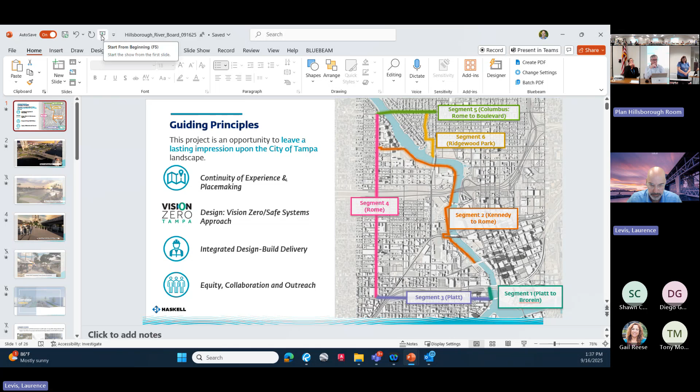Can you see this well enough? Not yet. One second, we are adjusting the volume. Okay, are you sharing your screen now? We were seeing it online a minute ago. We're just working on in-room issues. Okay.

Yeah, if you want to share your screen, Larry. We saw his face, it was up for a second. Yeah, I thought I was. I'll do it. Right, let's share the desktop, let's see if that will work. We see your calendar now. Hmm, somebody's calendar. I'll leave on his, different monitor. How about, yeah, that's a different monitor. So let me go to the desktop. Oh, it's on for a second there. There it is. So just move your presentation over to your other screen. Yeah, you have, yeah, this is on my laptop. Oh, okay, so if we click, saw your blue screen for a second there, yeah, if you click on share on the top right of Teams, you can select the presentation from the drop-down menu, open up.

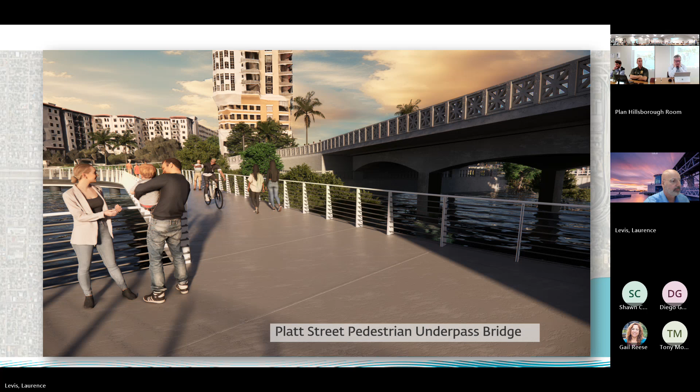Segment one will pick up at the north end of the existing Bayshore Boulevard Trail, south of Platt Street at the Columbus Statue Park, through the pedestrian underpass under the Platt Street Bridge, and go through Tony Jannus Park, temporarily along the seawall but ultimately arching through that park. THEA is going to be widening their Selmon Expressway as well. Then there's another pedestrian underpass under the Brorein Street Bridge, and that whole area is in green.

Nina, you can talk about the area between the Brorein Street Bridge and Kennedy and what's happening there with the joint development. There's currently a gap between our existing river walk that ends at the south side of the WFLA, next to our property. The city is talking to them about that. They have a condition in their old DRI, or rezoning, for the river walk on their property, but we've been having some communication issues, let's put it that way.

Just north of them you have the related group, formerly the Lafayette parcel, just south of the Kennedy Boulevard Bridge. They're supposed to be starting summer of '27, perhaps, and we're coordinating with them as well. They're going to develop towers along Kennedy Boulevard, west to east, then put a river walk on their property frontage and another pedestrian underpass under the Kennedy Boulevard Bridge, which they're currently having FDOT review since Kennedy Boulevard is a state road, but the river bottom belongs to the city.

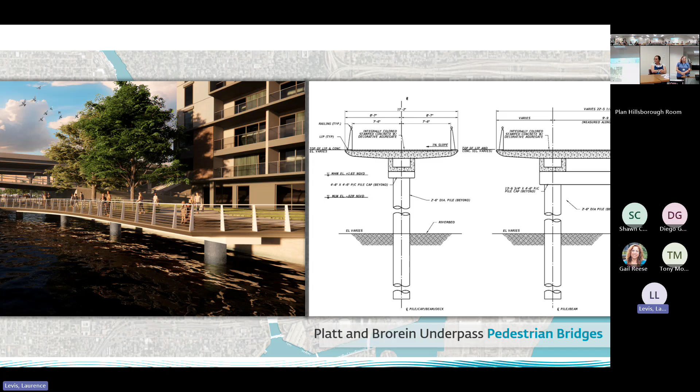So this is the way the bridges are being constructed right now. They're in advanced permitting and in-water permits. That's the Brorein Bridge, just north of the Bird Rookery, in the area Nina was just describing in front of that private property and apartments. The city has a typical easement for the river walk along the seawall.

The trail design is a little different as it goes through this 1.5 miles. There are certain areas where we will have living shoreline, a total of 1,500 lineal feet throughout the project. Where that happens, the toe of the slope will extend no more than 30 feet into the river with riprap, and there will be some encouragement of mangrove. I think you've seen other examples of living shoreline on the east side of the river.

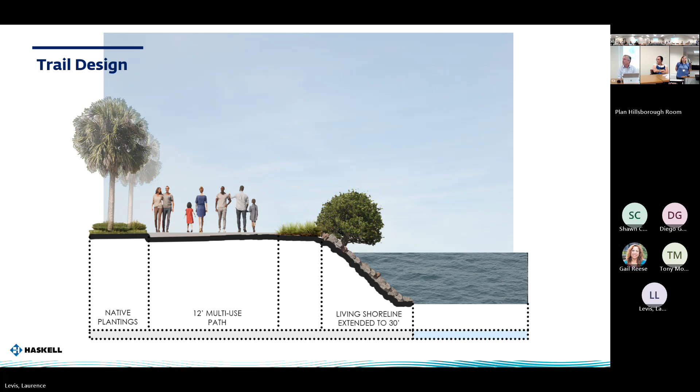Sam has done an excellent job keeping the public informed, and I'll turn it over to you, Sam, for a couple of slides.

We do have our next public meeting scheduled for October 16th. Is that right, Larry? Yes. And when he tells you about the website later, that alert for the meeting will be on the website. It's going to be in the evening at Beulah Baptist Church over in the West River area.

If anyone has used the app for the project, it's been up and running for a few months. You can get it on your mobile phones as well as on the internet. It's www.westriverbuilds.com, with multiple tabs for maps, explanations, frequently asked questions, and an alert site. Once construction starts, probably mid-November, particularly on the living shoreline near the Platt Street Bridge, there will be construction updates and detours posted.

The in-water permitting is continuing quite well. The bridges and underpasses we anticipate will be fully permitted by the first quarter of next year, and we've already received the living shoreline permit. That's encouraging, and it leads us into the sequential construction starts, as Nina just alluded.

Segment 1 demo, mid-November. Segment 1 is Tony Jannus Park. The living shoreline south of the Platt Street Bridge, a little section between the Platt Street Bridge and Columbus Park, will start in early December. Then segments 2, 3, and 6 have a January or February start date—again, this is just a sequential flow. Segment 4, Rome Avenue, and the bridges would begin in February and March after we get the permitting, and segment 5 in April and May.

Segment 5 we didn't talk about much, but it's a little piece that's in concert with Hillsborough County up at the corner of Rome. So that's where we are—that's the update of the project and the schedule.

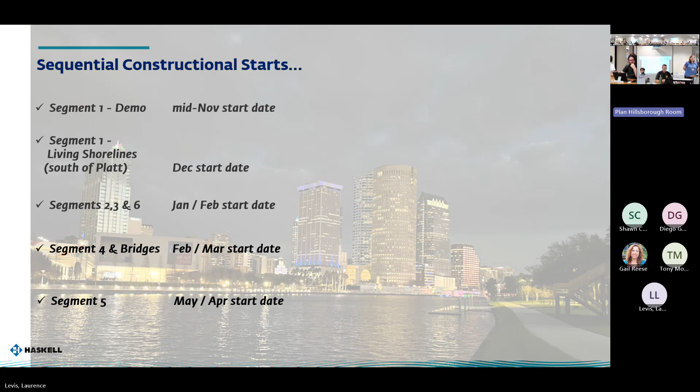Any questions? Larry, you did receive the permits from EPC with the manatee restrictions for time of year, correct, for most of the living shoreline? Correct. Those were just approved a week or so ago—September 8th. And Haskell is returning requests for additional information back to some of the permitting agencies today. That's part of this—the bridge, underpasses, and overlook—which we anticipate will take a little more time, but we're in the thick of answering and responding to the various agencies.

In addition to the two underpasses at Platt and Brorein, in between those, right off of Tony Jannus Park, there's going to be a three-sided overlook. Larry, do you know off the top of your head how far that projects past the seawall? Was it 40 feet or so? About that, maybe 30 or 40—35 feet to the outside railing.

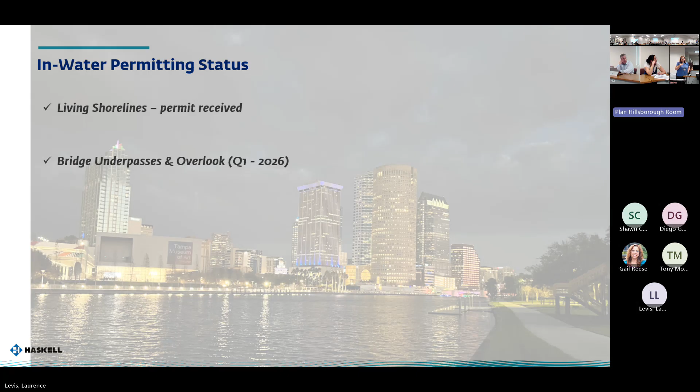That's going to be integrated into the ultimate park configuration. We're going to have a temporary trail along the seawall where there's an existing 10-foot trail—it's going to be widened to 15 feet. But THEA has offered to build the park on their property under their elevated facility because their project won't be done until 2030, although we should be done in 2027. They said they're just going to rip up what we installed, so they offered to do that. That's part of their Selmon Expressway widening, which is why we have the temporary facility along the river.

When we coordinate with THEA, we'll be talking about protection for the facility, pedestrians, et cetera. Not that they won't have to close it, perhaps intermittently, but we're not going to have it closed for any long duration period of time. Wonderful.

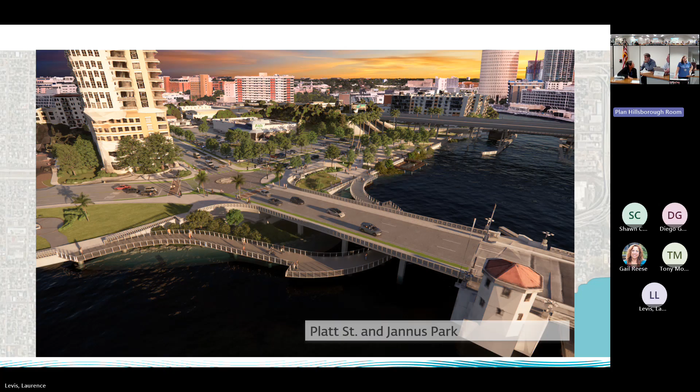Hey Larry, could you change it to the main overall view of all the different segments? Thank you. So for everybody here, this is the THEA Expressway—it's the last project on our review right now for this meeting. Tampa Expressway, THEA for short, is proposing to widen the interior gap between the existing expressway bridge that crosses over Hillsborough River. There are also 3 segments that the application is in review right now with the port for the 3 southern segments that she was explaining.

Okay, all right, you got it, Larry, you point.

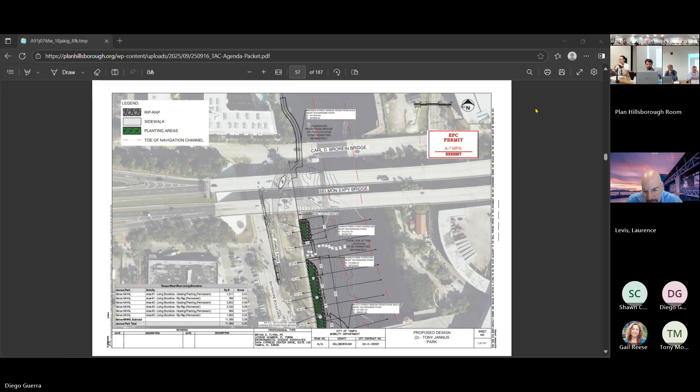Over time, not immediately but over a few years, it's anticipated that the living shoreline green material would grow over and basically obscure that initial gap. The throat of this overflow structure from sanitary sewers converges here, both from under the river - there's a subaqueous line. There's a structure whose base is this actual seawall with an overflow that did get utilized during past hurricane events. It's only 14 feet wide, so they're going to make modifications and lower the living shoreline there. There's nothing in the middle of the overlook area, because there's also the stormwater outfall.

Do you anticipate any problems with having that riprap living shoreline installed before the overlook structure and the other over-water structure piles are installed? Here, there is no conflict.

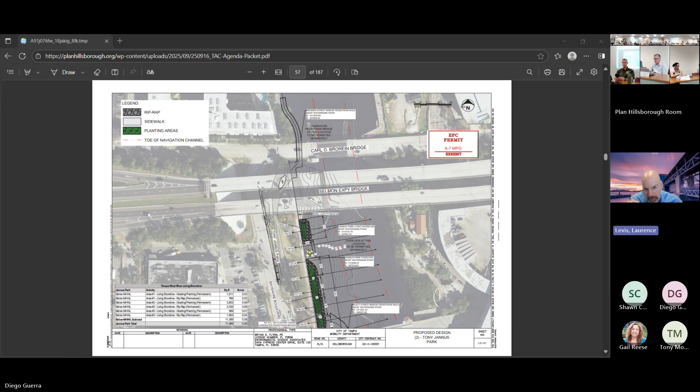To the south, if you look at the sheet just sequentially to the south, that's what your initial question was about - is there some riprap that does conflict? So we're looking at the sequencing as we speak between pile driving, placing of riprap, and then coming back to pour the bridges and do the precast bridge.

And the overlook area, which was originally conceived to be timber piles, etc., has been upgraded - right, that's all concrete. It's all concrete pile, for both structures, all three structures.

Well, I'm sure I'll be getting comments from you guys when I process the three southern segments of the overpasses, underpasses, and overlook structures.

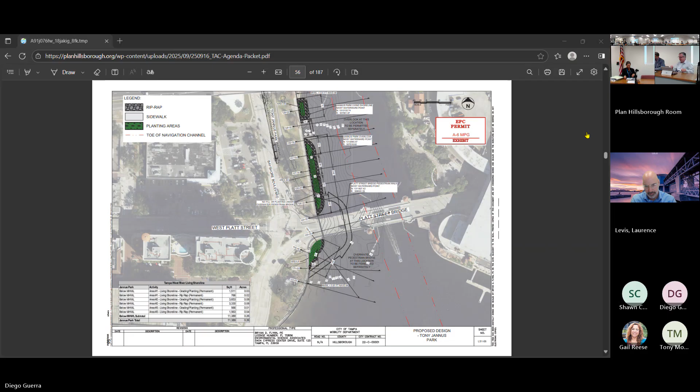Larry, the port may have the 60% drawings, and not that they're necessarily looking at structures like the city is, with our owner's rep, but you might want to get them the new 65% submittal so they have it. And that would be me, Larry, if you want to send it to me, Jackie Julian, or put it in the BaseCamp project folder.

Does anybody have any other questions regarding the West River Walk living shorelines? Hearing none, okay, I have an unrelated related question.

Did the port authorize the marina for the related group south of Kennedy Boulevard Bridge? They have like a floating boat slip area. The RWD - yeah, that's it - not at this time. Not this time, just curious.

All right, last project on our list is going to be minor work permit 25-007. This is the Tampa Expressway Authority, THEA for short - bridge expansion, interior bridge expansion. Diego, could you pull up at least the first page so we can show the location?

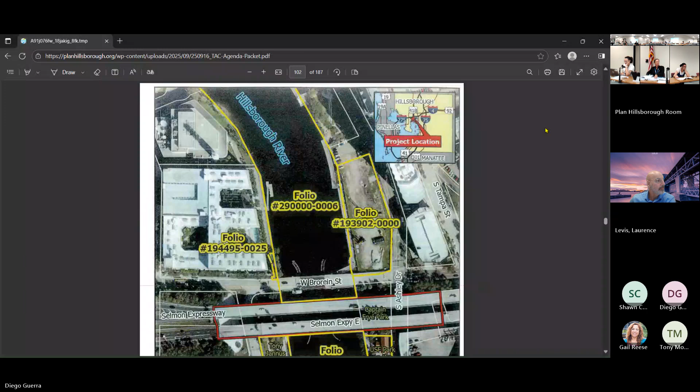Bear with us for another second while Diego pulls up the plans. Thank you, Diego. Okay, so this is the general area of the project and the abutting ownership boundaries. This interior area between the existing eastbound and westbound bridge, on Selmon inside, is what the expansion is going to be. They are not widening it on the exterior sides, only the interior area.

They are going to put additional support piles as well for the new bridge expansion, and it is going to have pieces of multi-use shoulder lanes for pedestrians, bikes, and other such uses. The final layout for the bridge is going to basically look like one huge bridge span all the way across, with the interior filled.

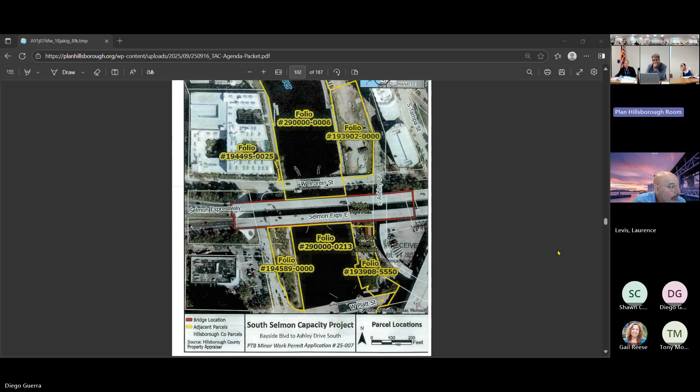Does anybody have any questions regarding the Selmon Expressway expansion? The design and build contractor is Archer Western. And the city that owns the river bottom is also giving them an easement.

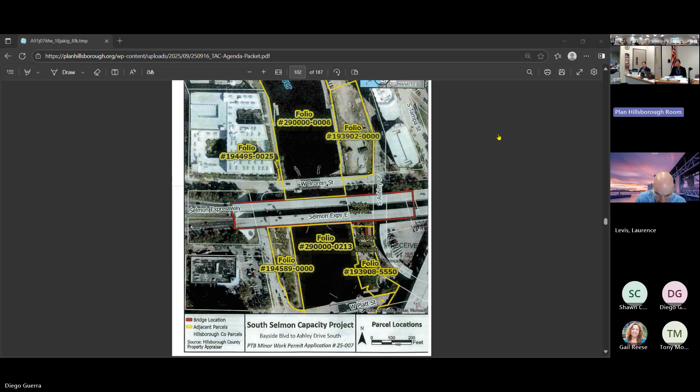Good point, yes. So we are working with the City of Tampa as well, as she said, due to the fact that the City of Tampa actually owns the sovereign submerged lands of the Hillsborough River at this location. Our contractor and the previous contractor are going to be coordinating, but we plan to start in October, November in that area. The city also owns the property up here, their elevated facility on the land side, but the city has an easement - of course, we're subordinate to their work - and we anticipate starting next March, so there's going to be some coordination there too.

Yes, and I understand that Hillsborough County is going to do some work on Platt Street Bridge as well. I just know that.

We're only focused, for this marine construction project, on the segment of the bridge that's from seawall to seawall over the river. But the whole segment goes much further, all the way to the Gandy connection for Selmon. So please know this review is strictly for the Hillsborough River crossing segment, not the overall project.

Does anybody have any other comments, questions, or concerns regarding the Selmon Expressway? Only other comment from EPC is that based on our initial review, it appears it's also going to require an EPC impact review. We'll be having a pre-application meeting with some of the folks about the project tomorrow morning to discuss the impact meeting. Wonderful, thank you, not a problem.